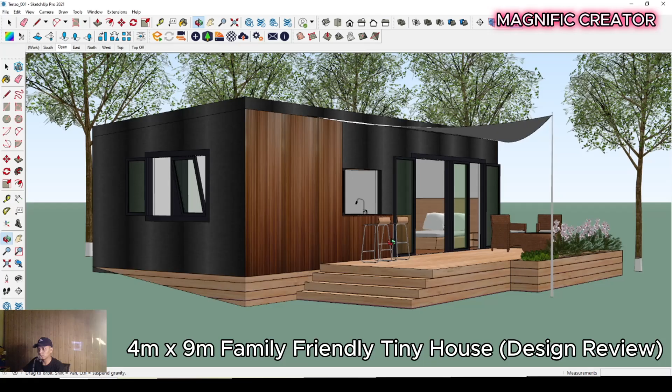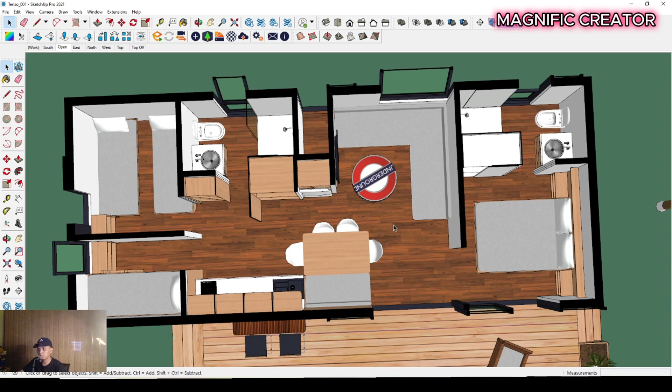This tiny house has one terrace on the front side with a membrane canopy, and the dimension is around 4 by 9 meters for the length. I will show you the floor plan. It's a great arrangement of the floor plan because it has much room and much function in a small space like this layout arrangement.

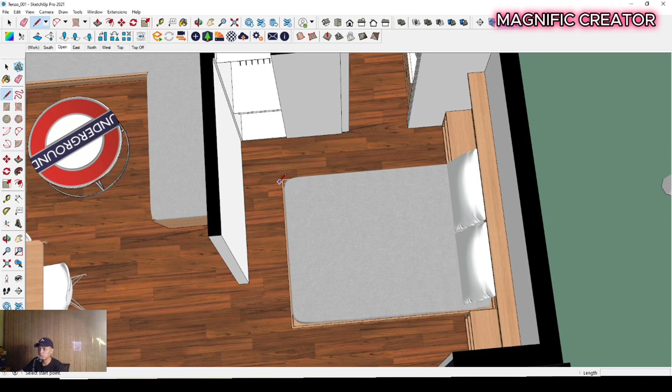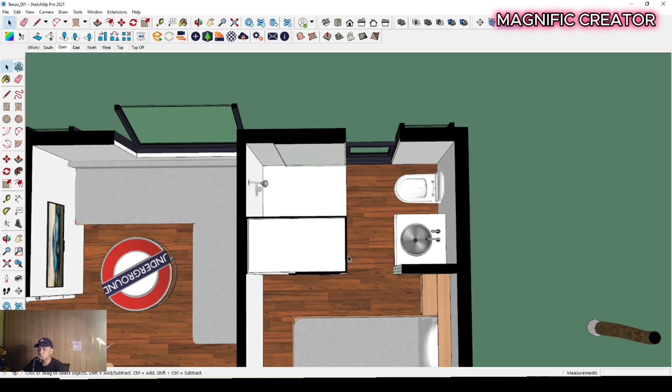First, let's look at the master bedroom. It has a dimension of around 2.3 by 2.2 meters, and it can accommodate a mini twin bed. It has a wardrobe, a sink, wastafel, closet, and shower cabinet. I think it's a great floor plan arrangement for this master bedroom in such a small space.

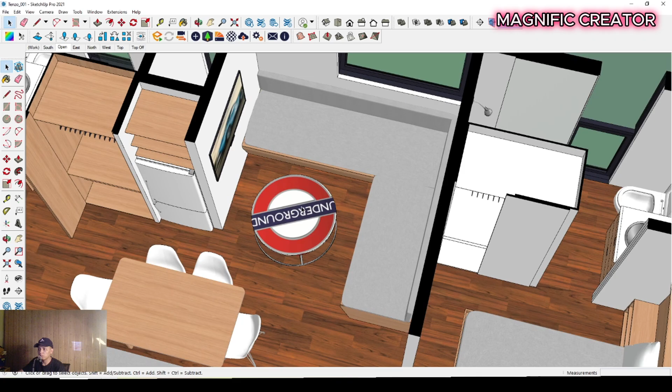For the middle room or living room, this is an open layout concept between an L-shaped sofa with a circular table and a wall-mounted TV, and then it has a kitchen.

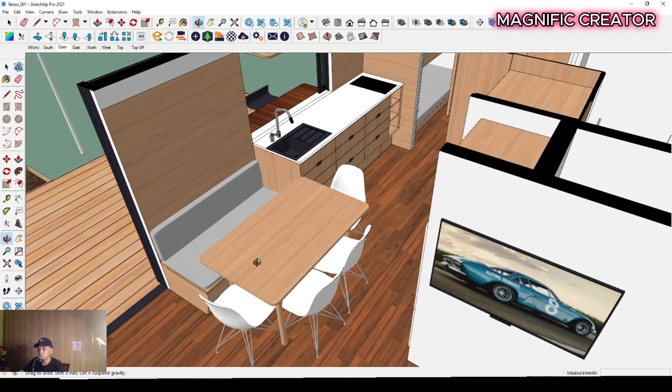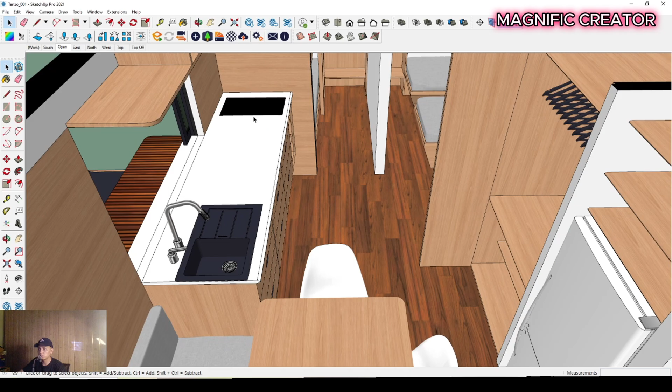It has a kitchen, I will show the field of view option. It has a kitchen with a simple but large vibe dining room, so it could accommodate a lot of seats, around 6 seats. This is the kitchen with one sink and a countertop, and it has a cabinet above the kitchen window.

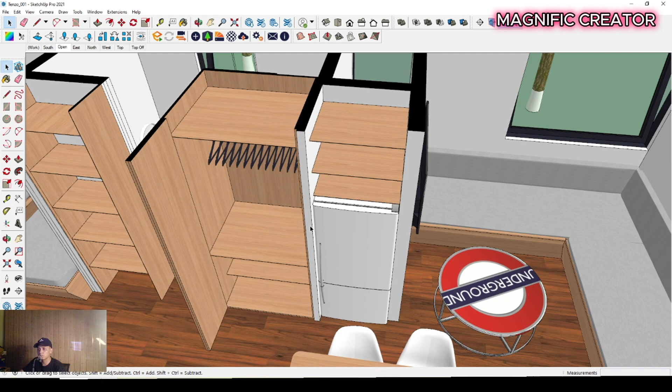Then it has a small wardrobe over there in this area, and it has a small refrigerator space, and a small cabinet in this space.

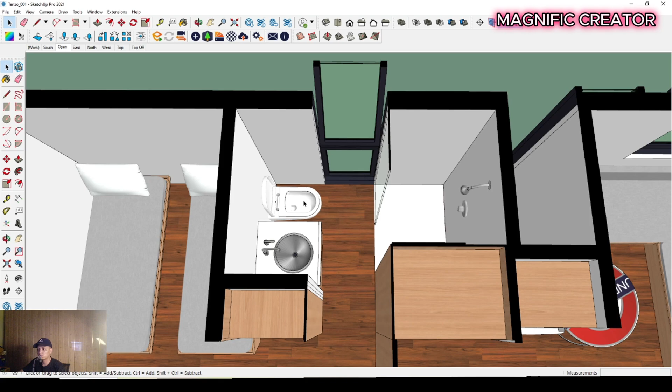This is the storage space in here, and we can access the outside of this tiny house. It has an outside bathroom and closet with a wastafel, closet, and shower cabinet, with enough daylighting from the window. I think it's a great arrangement for this tiny house.

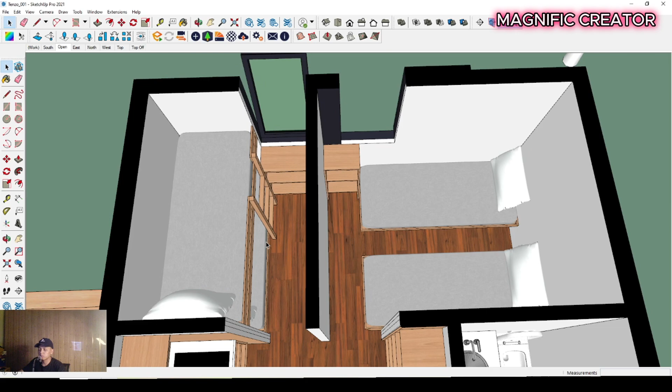The special thing in this tiny house is it has a lot of beds. It has 2 single beds in a parallel position and 1 bunk bed, so it could accommodate 4 more people besides the master bedroom.

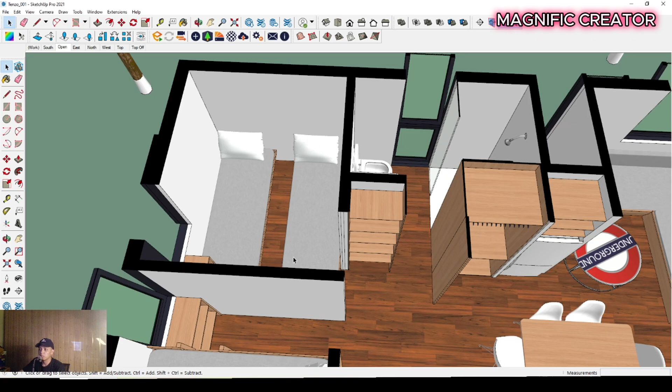I think this is such a special tiny house, perfectly planned for a tiny house concept, with a terrace area and minibar in the semi-outdoor space, because it has one canopy, one membrane, in this area.

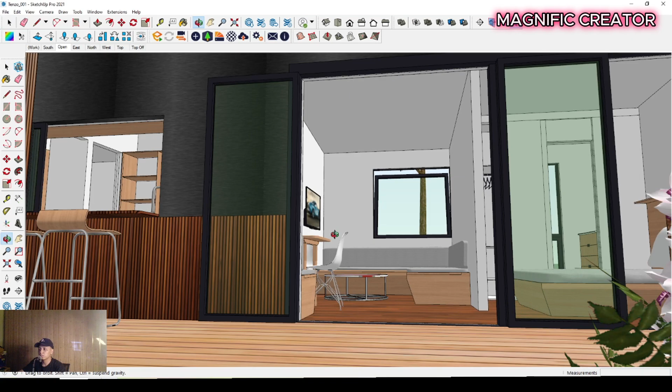And this is the look of the interior concept. You can see about this, I think it's great enough, and there's a lot of transparent windows and doors, so it could maximize the daylighting system into the indoor rooms.